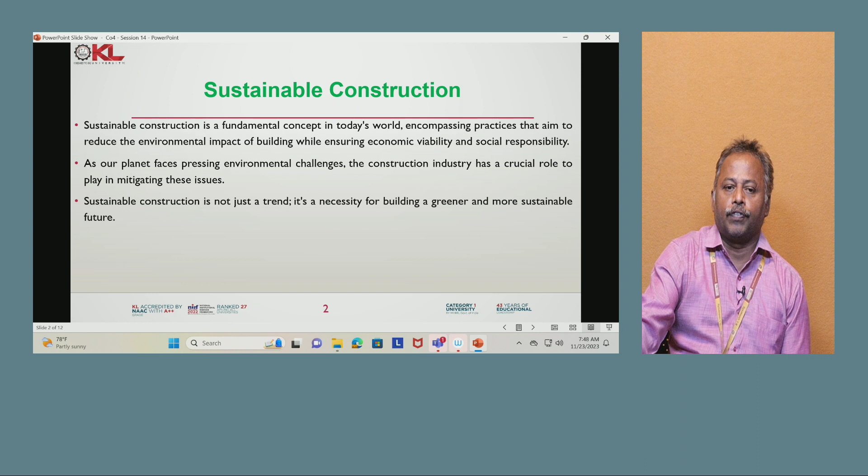Sustainable construction is a fundamental concept encompassing the practice whose main objective is to reduce the environmental impact of buildings while ensuring economic viability and social responsibility. Our planet faces pressing environmental challenges, and the construction industry has a crucial role to play in mitigating these issues. So sustainable construction is not just optional, it is a necessity for building a greener and more sustainable future.

The main principles of sustainable construction: first, to minimize the environmental impact of construction and subsequent operation of the building, to reduce energy consumption and water consumption, and to minimize waste generation. Sustainable construction practices must be economically viable and ensure widespread adoption, and must incorporate social responsibility by considering the well-being of occupants and the community.

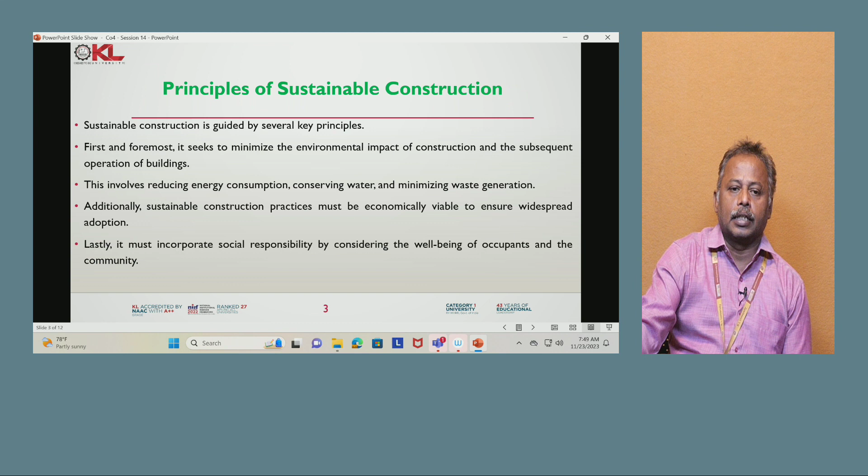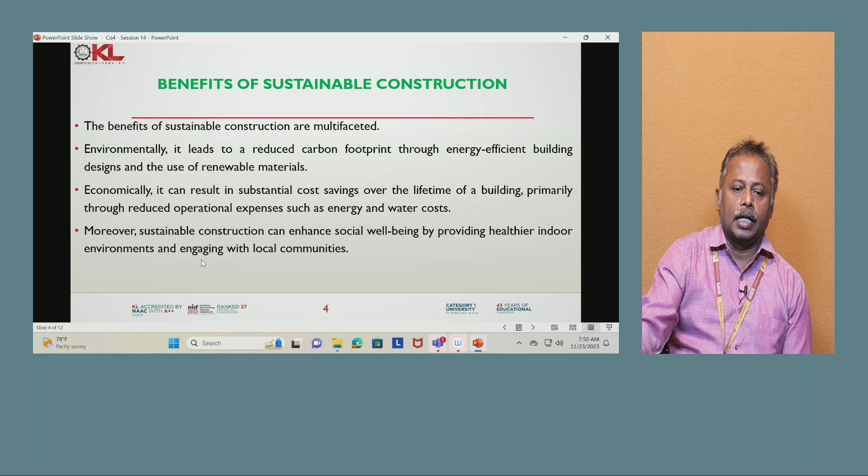Benefits of sustainable construction: the main benefit is reducing the carbon footprint through energy efficient buildings. Economically, sustainable construction saves costs over the lifetime of buildings, primarily by reducing operational expenses, and energy and water costs. These reduce building cost and energy cost as well. Sustainable construction also provides social well-being by offering healthier indoor environments and engaging with local communities.

Sustainable building materials: one cornerstone of sustainable construction is the use of sustainable materials, including the utilization of renewable and recycled materials wherever possible. Sustainable construction also considers the life cycle of materials, encouraging cradle-to-cradle design where materials can be reused or repurposed at the end of life, which automatically reduces waste.

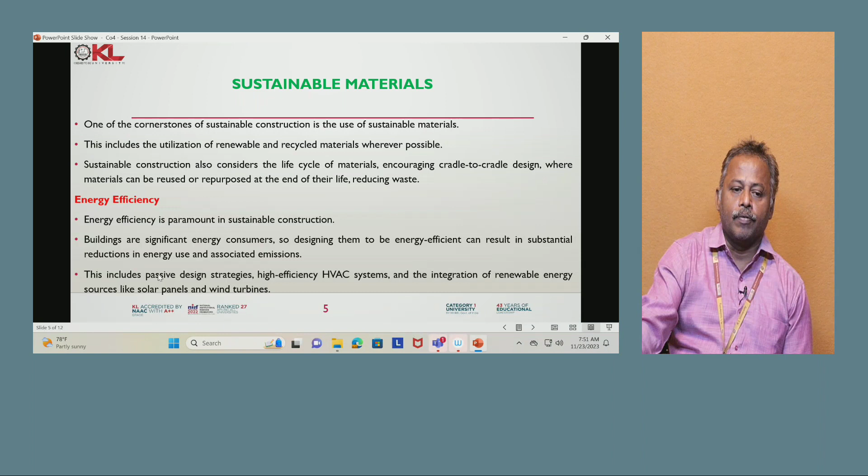Energy efficiency is paramount in sustainable construction. Buildings are significant energy consumers, so designing for energy efficiency results in a substantial reduction in energy use and associated emissions.

Water conservation: water is a finite resource, and sustainable construction uses it wisely. This involves installing water-efficient fixtures, rainwater harvesting systems, and reusing grey water for non-potable purposes. Water conservation not only reduces cost but also helps with water scarcity issues.

Next, sustainable site planning. The main objective of sustainable site planning is to minimize the environmental impact of the construction project.

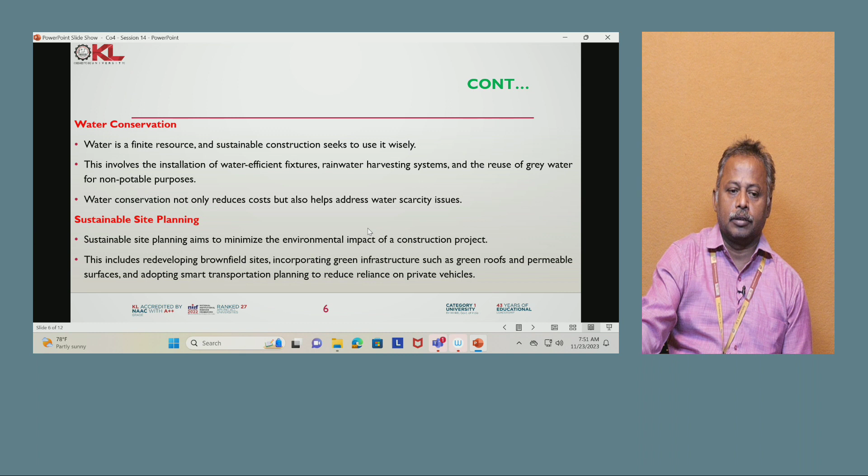Next, waste reduction. Construction generates a significant amount of waste, but sustainable construction aims to minimize this impact. Effective waste management practices, designing for deconstruction, and promoting recycling and material reuse are essential aspects of waste reduction in sustainable construction.

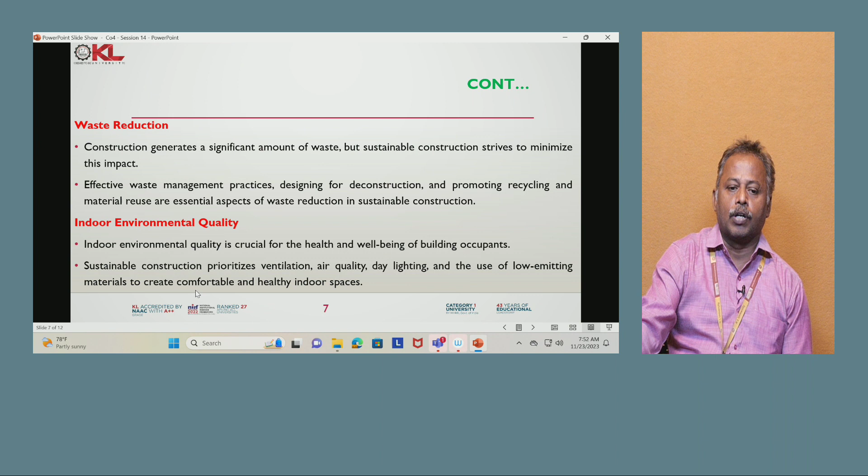Next, indoor environmental quality, which is crucial for the health and well-being of building occupants. Sustainable construction prioritizes ventilation, air quality, and daylighting, and uses low-emitting materials to create comfortable and healthy indoor spaces.

Next, green building certification. Several green building certification programs like LEED, BREEAM, and Green Star exist to assess and recognize sustainable construction practices. These certifications provide frameworks and standards for sustainable construction practice, and help validate environmental performance.

Next, sustainable construction challenges. While sustainable construction offers numerous advantages, it includes a higher initial cost associated with sustainable materials and practices, and limited availability of sustainable materials in some regions. Regulatory hurdles may also impede sustainable construction efforts.

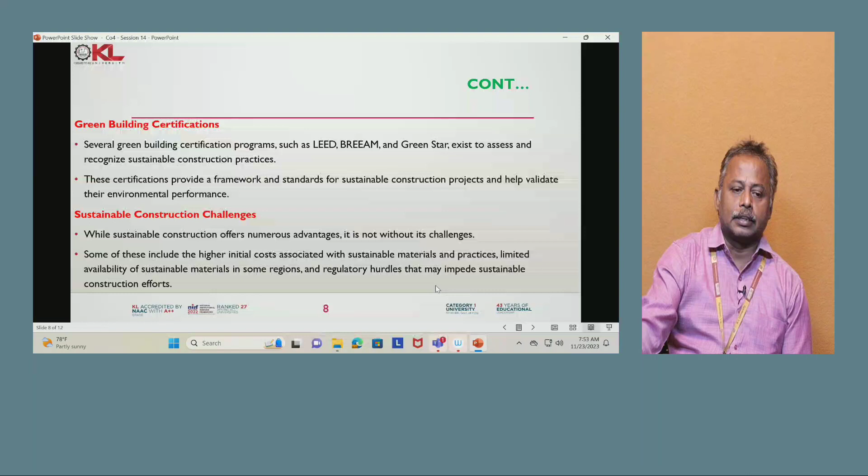Next, future trends in sustainable construction. Future trends include net zero energy buildings, integrating smart building technology for enhanced energy management, and adopting circular economy principles where materials are reused and repurposed.

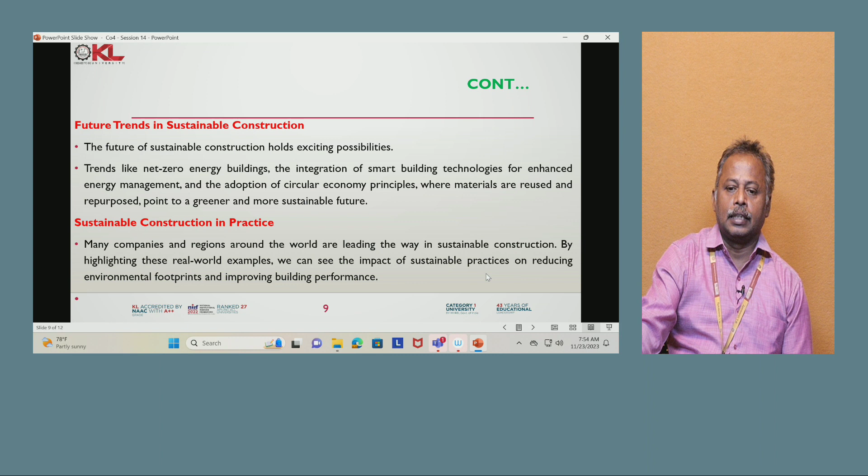Then, sustainable construction in practice. Many companies and regions around the world are leading sustainable construction. By highlighting these real world examples, we can see the impact of sustainable practices in reducing environmental footprints and improving building performance.

Then, the role of government regulation. Government policies and regulations play a crucial role in driving sustainable construction practice, through incentives, subsidies, building codes, and prioritizing sustainability, which can significantly influence green building practice.

Next, education and training, which is provided for advancing sustainable construction. Construction professionals need to be well-versed in sustainable practice, and various training programs and certifications are available to support this goal.